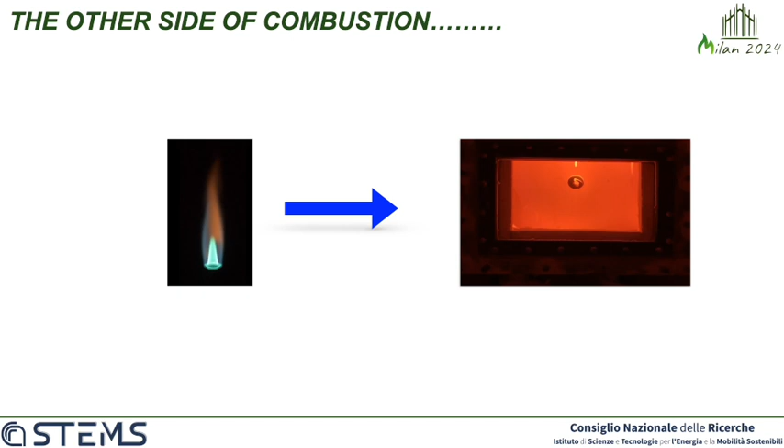Because this symposium aims to emphasize energy transition, I would spend a couple of words talking about energy, looking at needs and critical issues that we have to face for transition, and what is the role that the combustion process has to cover during and beyond the transition, and how we can frame the role of mild combustion, looking at its feature structure that we can see in the volume, fuel flexibility in terms of kinetics and pollutants, and the related research needs and challenges.

I'm saying nothing new, underlining that there are two main enabling concepts for energy transition: the utilization of renewables, which has to be maximized, and the electrification of the energy grid, which is often thought of as the highway for the exploitation of renewable energy sources.

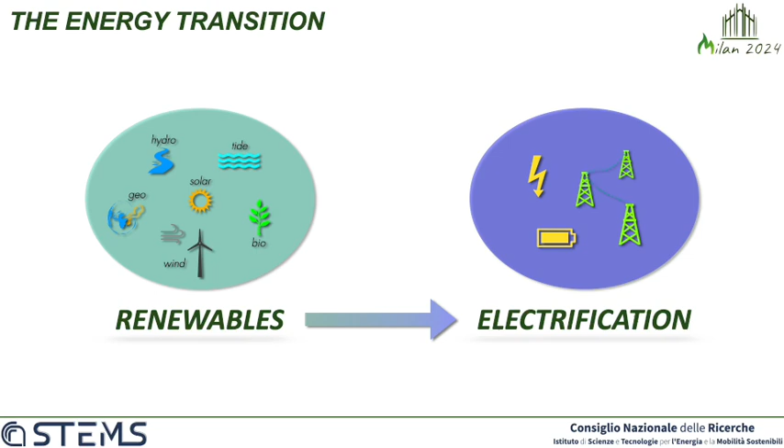In this panorama about the shared installed capacity of renewable energy sources, we have to face a very huge number that has to be phased in the very next years, because the installed capacity is considered to increase by about 188%, with a shared capacity that has to reach 77%.

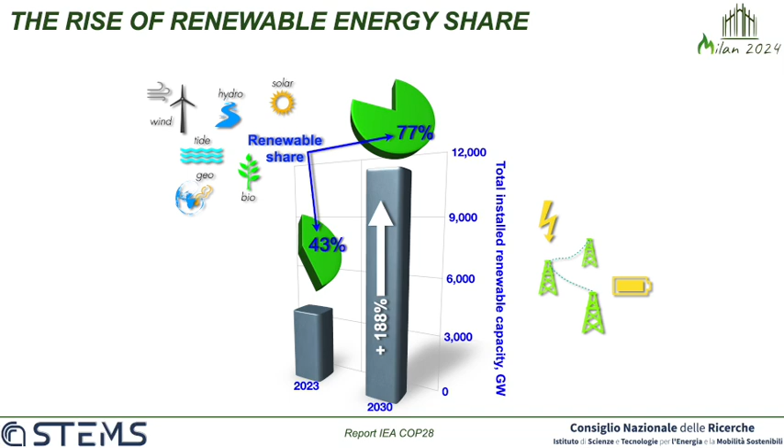To face with such a huge amount of installed capacity, we have to deal with two main issues: availability of critical metals and infrastructure.

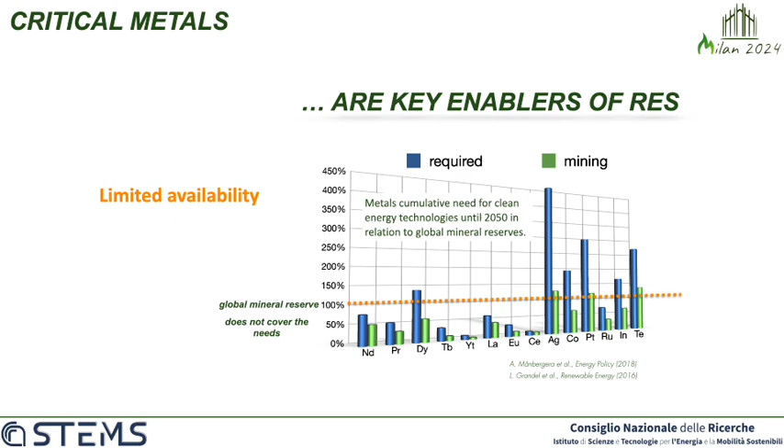Why critical metals? Because they are key enablers of renewable energy sources, and when we look at the needs of metals for energy transition, the numbers show that the global mineral reserves needed to meet the target of energy transition do not cover the needs. And it is even worse if we look at the capacity to mine the metals, due to technological limitations of mining.

Of course, the requirement could be satisfied with end-of-life recycling, but we would need a certain rate of end-of-life recycling in order to meet the energy transition goal, and the actual rate is like this. Thus, the critical mineral shortage could disrupt the global supply chain.

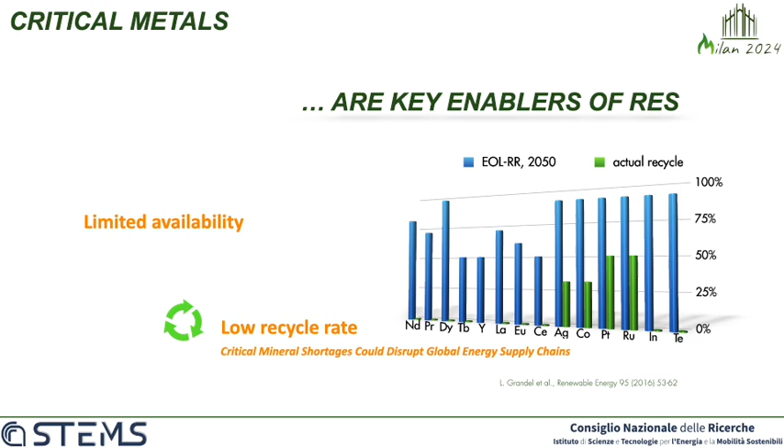Of course, there are other drawbacks that come with massive utilization of critical metals: the impact that massive extraction of metals has on the environment, in terms of disruption of mining regions, and the huge amount of pollution of land, water, and air, which causes severe environmental damage.

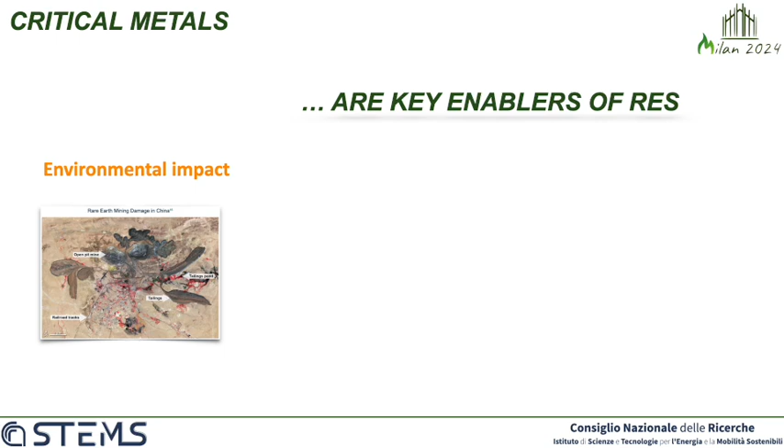There is a second critical point related to the environmental impact of critical metals: the exploitation of unexplored regions for mining of critical metals.

This is the case of, for example, deep sea mining - the sea deeper than 200 meters - which has abundant levels of metals such as copper, cobalt, and nickel in different geological aggregates. It is estimated that the sea has cobalt, for example, about 6 times as much as the current land-based reserves, a reserve that corresponds to $16 trillion.

The race for deep sea mining has already started, but unfortunately the mining of all these materials has an unforeseeable and unavoidable impact over the ocean and over areas and ecosystems that are still unknown.

Indeed, cutting and dragging of rocks generates localized plumes and solid waste material deposits, which also contain heavy metals, so they are toxic and can affect fish resources.

Another point of pollution is noise pollution, which will impact whales and other marine life.

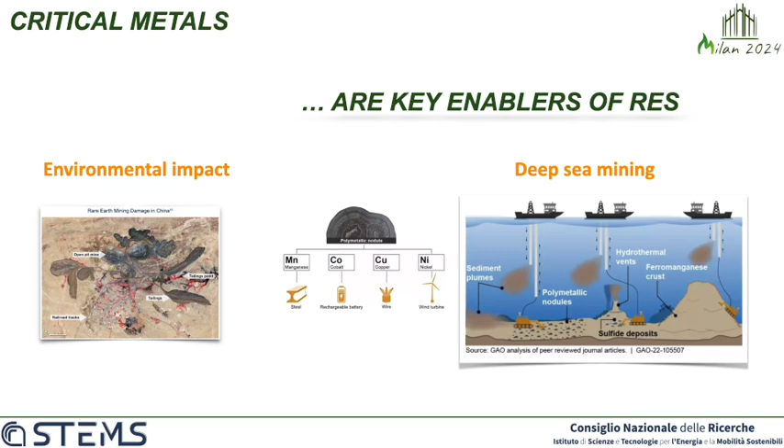The other issue we have to face during energy transition is the availability of infrastructure. We have to keep in mind that, just looking at non-industrial applications, people with no access to electricity account for about 10% of world population - almost equivalent to the European population, or 3 times the US population.

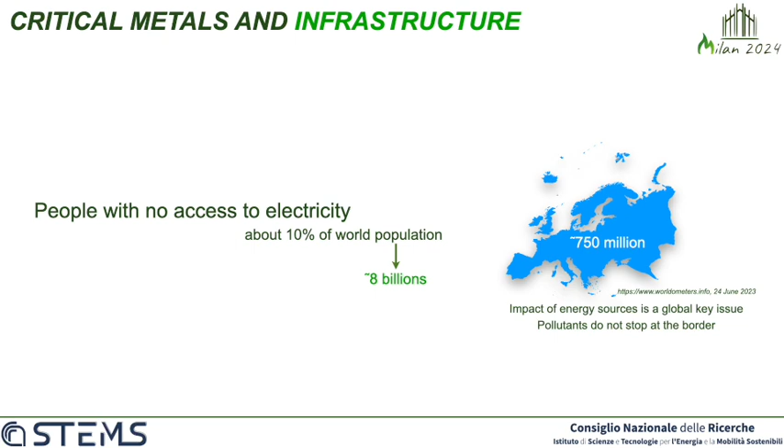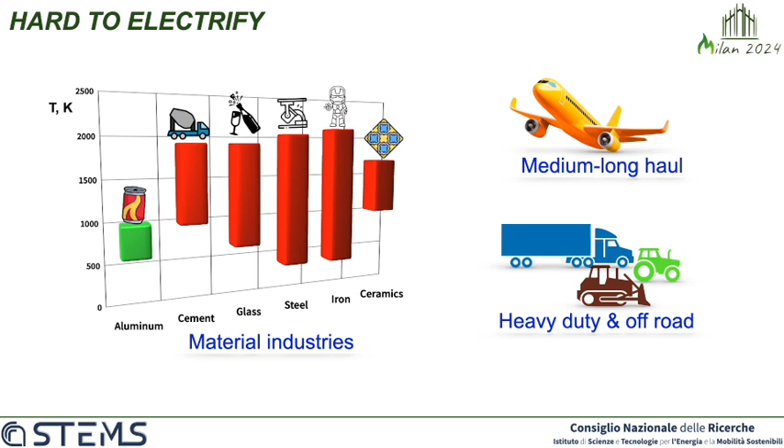Of course, the same problem with infrastructure is also relevant for industries, but the other point for industries is that there are many sectors that are hard to electrify because of the temperature involved in the process, for example. This is the case of materials industries, or because of obvious considerations related to aviation and heavy duty transport.

Of course, in this framework, combustion has to be thought of and becomes a key enabler of renewables, covering a fundamental role in support of renewable deployment.

Indeed, combustion helps to maximize the use of renewables, taking advantage of chemical storage, which is by far the most efficient way to store energy in terms of duration and capacity.

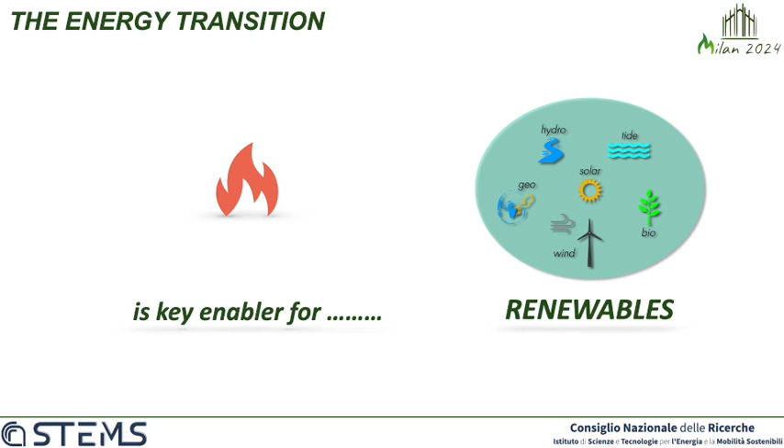The net outcome is that following that path we have a very wide palette of molecules, from low calorific value as biogas and ammonia to alcohol, biomethane and hydrogen. These are only a few examples that have very different characteristics in terms of combustion intensity, so very different heating value, flammability limits and laminar flame speed.

So what is the point? We need an ideal combustion system that should go beyond these characteristics and should meet the criteria of flexibility, both in terms of fuel, to easily allow fuel switching based on locally and timely available energy carriers, and also in terms of operational conditions in order to meet the characteristics of the process, so in terms of composition, load, temperature and so on.

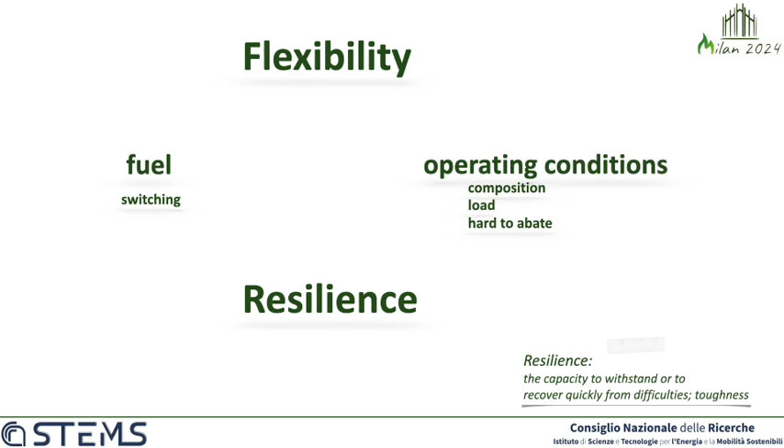So coming back to the other side of combustion, mild combustion is one combustion process that meets this criteria of flexibility. So what about mild combustion?

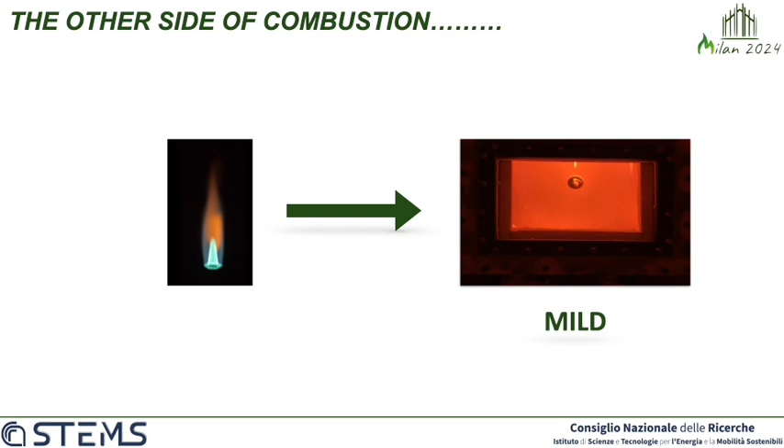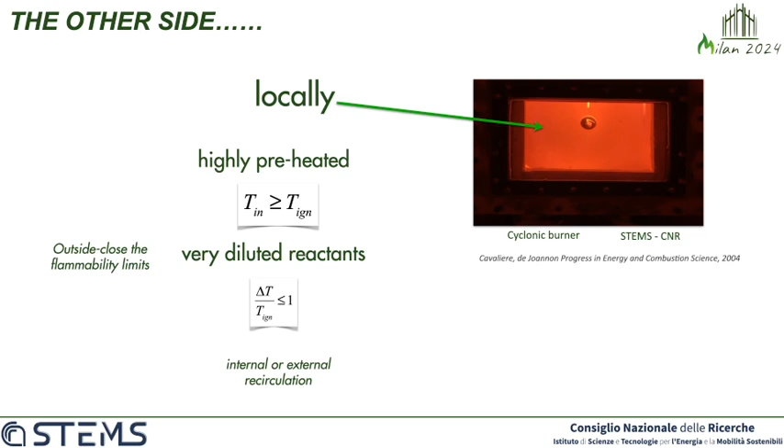It evolves from highly preheated reactants, preheated at temperature higher than their ignition temperature, and very diluted reactants, diluted at a composition that falls outside the flammability limit. So they are so diluted that their temperature increase during combustion is lower than the ignition temperature.

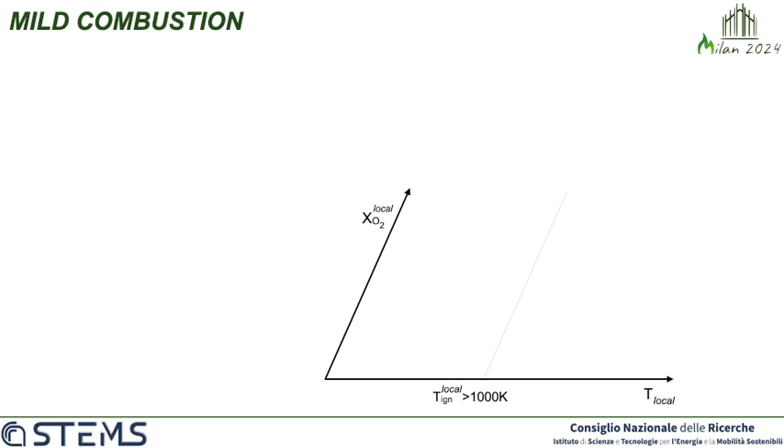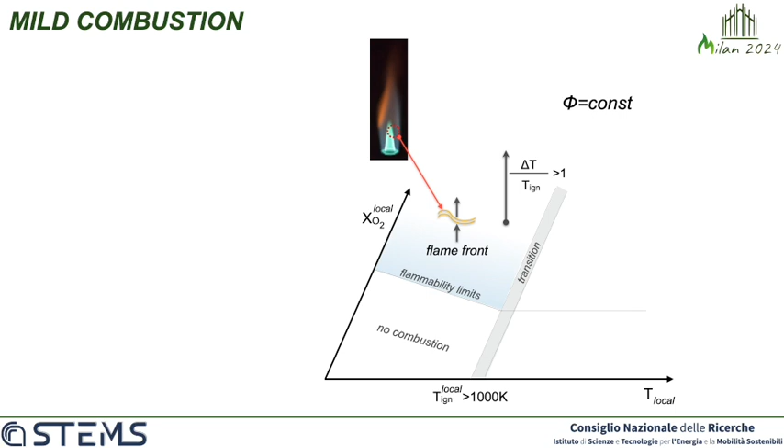Looking at a map where oxygen molar fraction and local temperature are reported, the upper left region is related to the standard combustion process, with oxygen molar fraction higher than flammability limits, associated with the stabilization of a flame front and high temperature increase. Mild combustion is placed in a different region where we have a different kind of process.

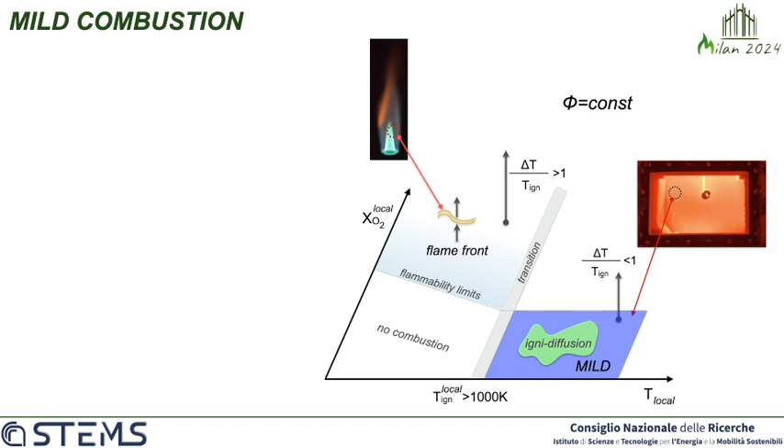It is really clear that lowering the oxygen concentration, corresponding to a high recirculation rate, there is a strong decrease of the Damkohler number. So the fluid dynamic and chemical time scales become comparable.

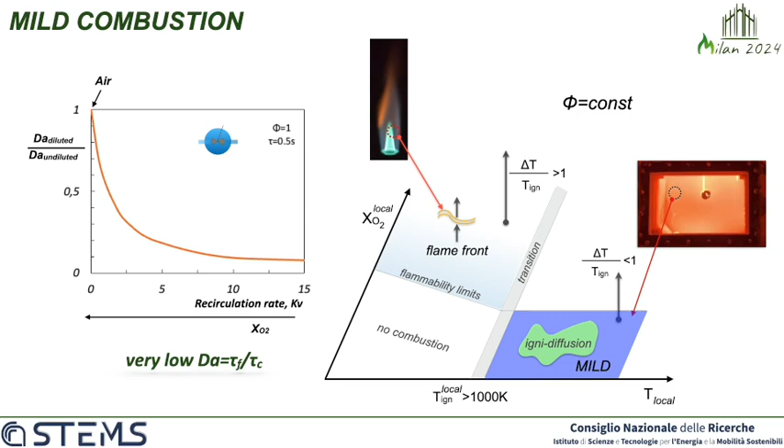If we put together all the keywords we talked about - low temperature, dilution, preheating, recirculation - altogether we have a process that leads to inherent features.

Indeed, it is flameless - no flame structures are visible in the visible range. It is noiseless. It is characterized by a uniform, almost uniform temperature and concentration profile. It is intrinsically self-stable because it evolves from ignition temperature. It is based on ignition.

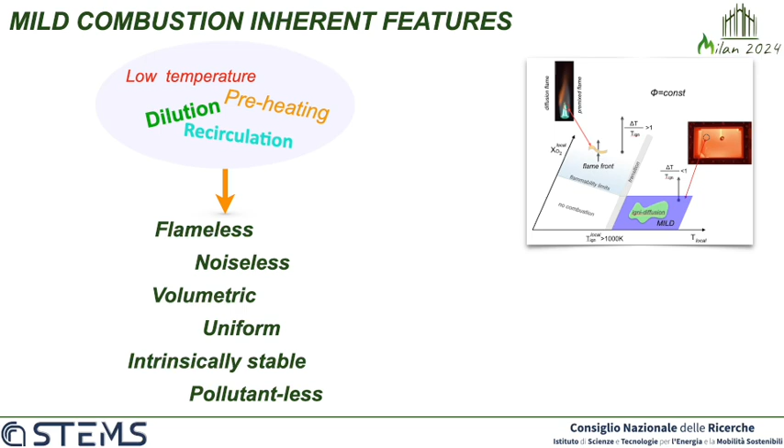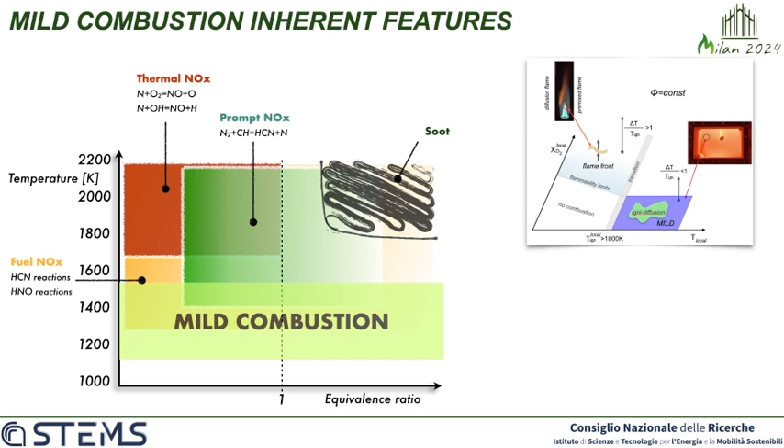It is pollutant-less. And indeed, if you look at the temperature and composition range related to the main pathway of pollutant formation, we see that mild combustion falls outside the range of, for example, thermal NOx, which is the main pathway for NOx formation, and for sure outside the range of soot formation.

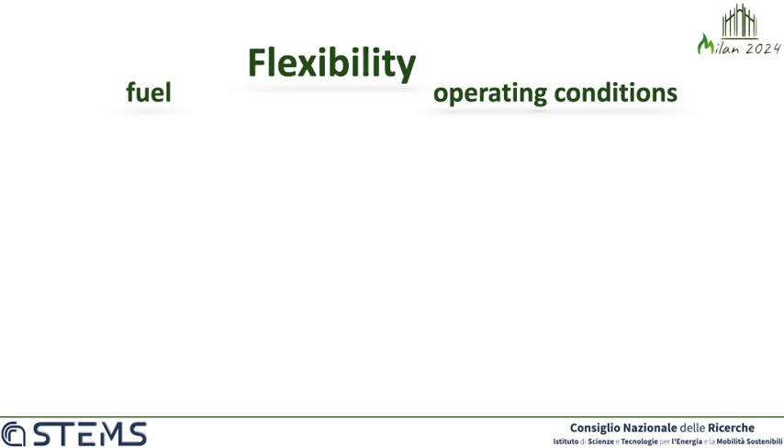So let's go analyze the flexibility of mild combustion. Mild combustion was proven to be a robust combustion system for fossil fuels.

Let's explore the flexibility of mild combustion looking at those carriers that are archetypal for the energy transition, I mean hydrogen and ammonia, that also with respect to the characteristics of fossil fuel move towards opposite directions. So H2 with high combustion intensity and NH3 toward low combustion intensity.

This is, of course, related to their characteristics as fuel - higher combustion intensity for hydrogen and lower combustion intensity for ammonia. This, in this case, is mainly related to the heating value of the different kinds of fuel. So how to reach, from a practical point of view, the local dilution and preheating needed for reaching mild combustion?

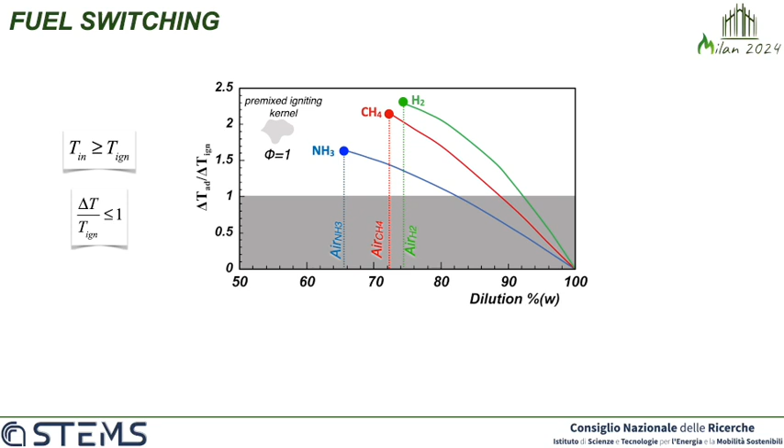In general, there are two main configurations that are taken into account. The reverse flow, where a confined burner is considered, and in this case a large part of the fluid is bended and returned towards the inlet region. And in some cases, the outlet is on the same side as the inlet section.

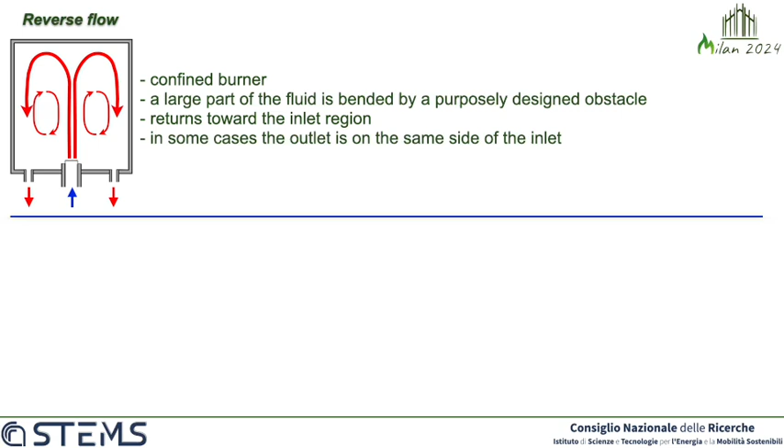And this is the example that is available at laboratory or pilot scale in many research centers all over the world, from Portugal to Australia to Germany and to Brussels.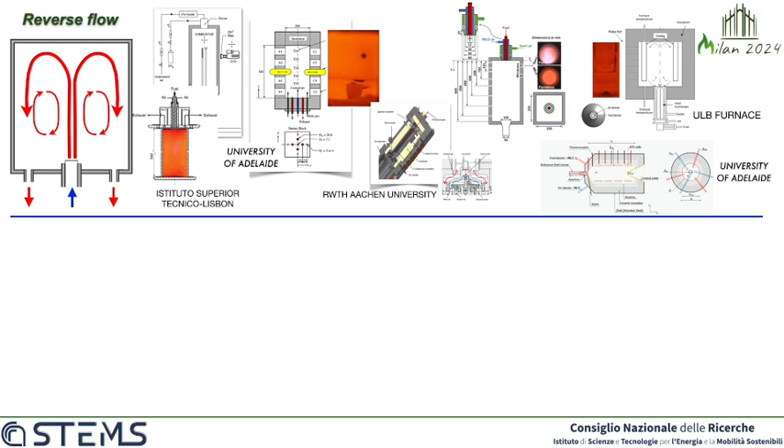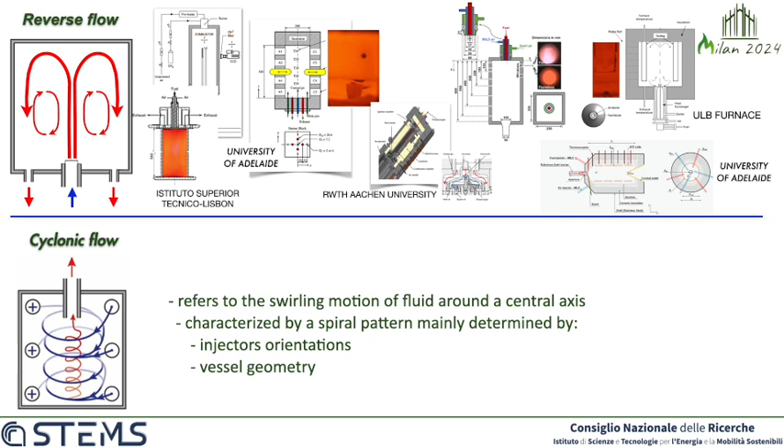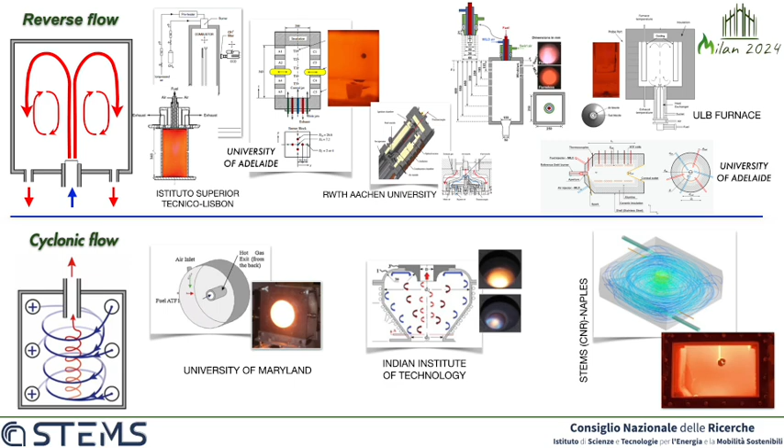The second configuration refers to a cyclonic flow that is mainly considered a swirling motion of fluids that move around a central axis, characterized by a spiral pattern mainly determined by injector orientation and vessel geometry. Also in this case there are many examples at laboratory pilot scale all over the world, in groups that work on mild combustion.

As already told, we have a change in paradigm of the ratio between fluid dynamic and chemical time scale. Traditional combustion processes are characterized by the fast chemistry hypothesis because chemical times are very low with respect to physical time scale. In mild combustion, the fluid dynamic time scale is comparable to the chemical time scale, because it evolves with a very low Damkohler number.

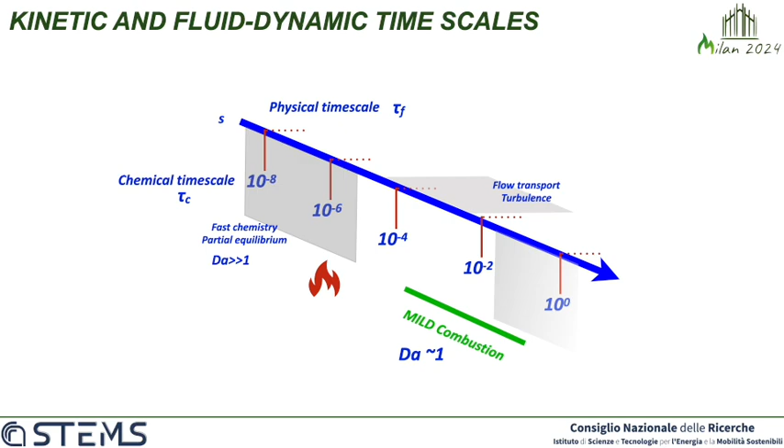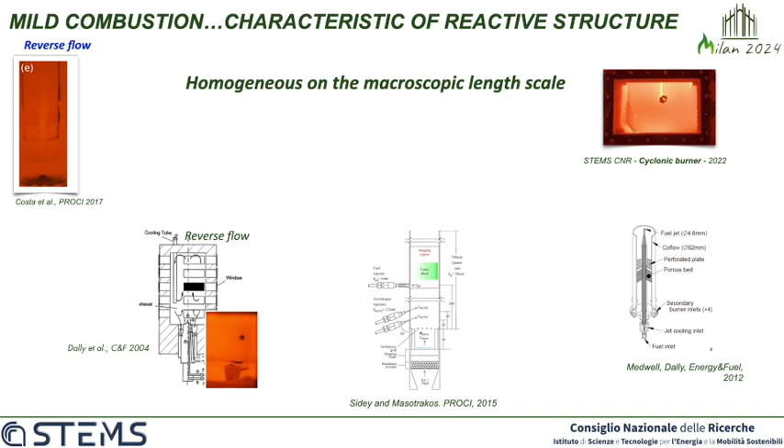Let's see how this impacts the characteristics of mild combustion. It is a process considered homogeneous at the macroscopic length scale of the combustion chamber, characterized by a nearly homogeneous temperature and concentration profile on the macro scale, but it is inhomogeneous at a smaller length scale, as demonstrated by optical diagnostics applied to the combustion chamber working in mild condition, shown in the figure.

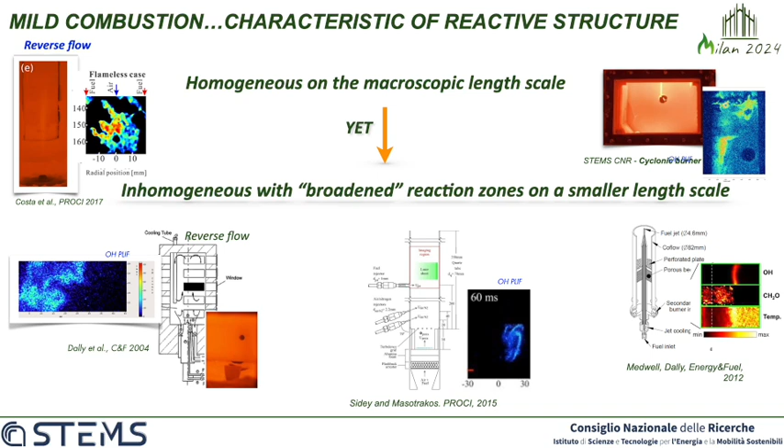On the micro scale there is evidence of a patchy appearance of spontaneous igniting kernels that ignite, grow, and then disappear. Authors, also in direct numerical simulation studies, evidence this distributed zone with different shapes, identified based on their form as blobs, pancakes, and ribbons, single or interconnected, mainly based on igni-diffusion.

Igni-diffusion is a specific spontaneous ignition process that, at the dissipative scale, differently from autoignition which is a homogeneous process, considers, in addition to the generation term, also the diffusion process, which in this case matters.

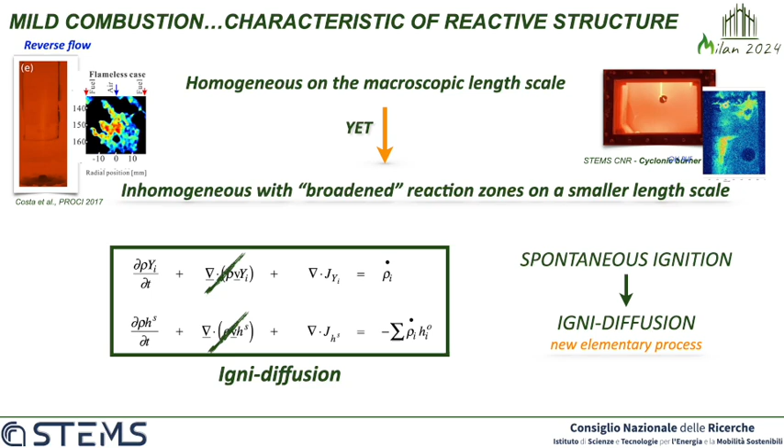An extensive characterization has been made in the literature of igni-diffusion, looking at the evolution of the process and the stabilization of a structure in a mixing layer derived from the interaction of hot and diluted streams of fuel and oxidant, in particular looking at the shapes of heat release rate in the mixture fraction domain.

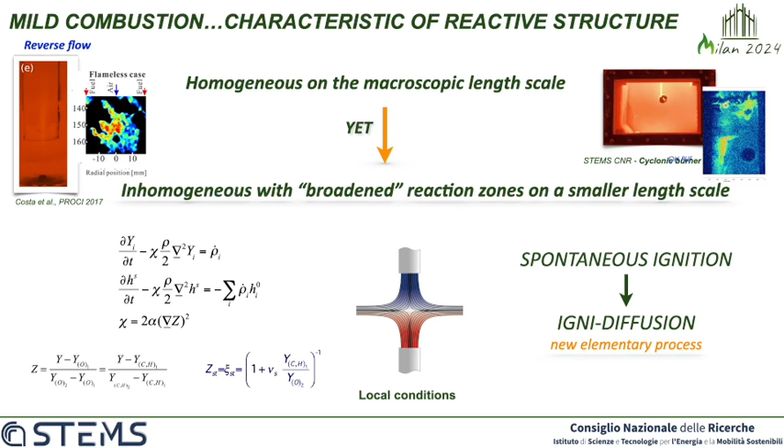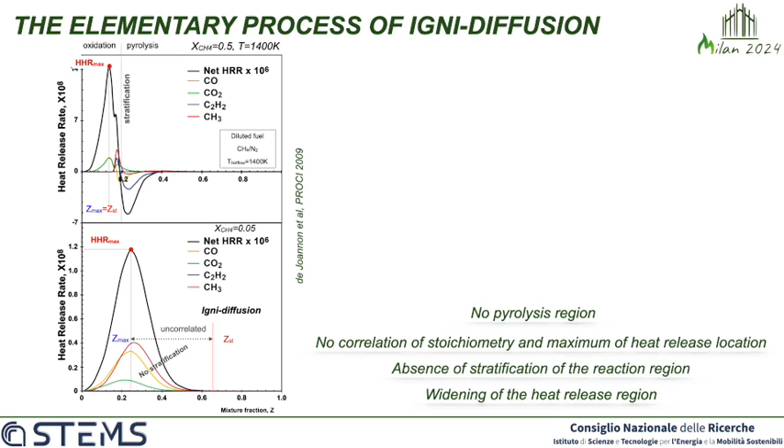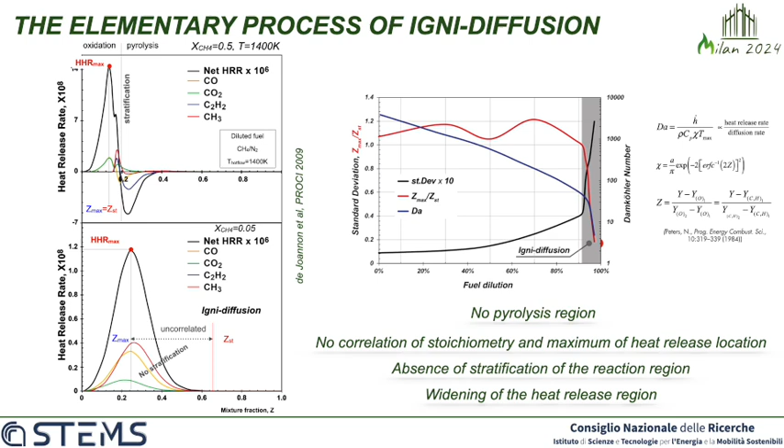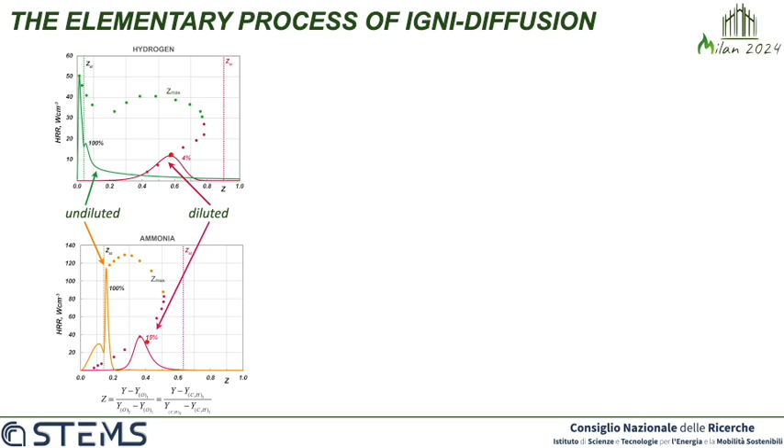This happened for methane, but the same characteristics are kept for the igni-diffusion structure of ammonia and hydrogen. Looking at the heat release profile of hydrogen with increasing dilution, we see that the stoichiometric mixture fraction is correlated with maximum heat release until a certain dilution value where this correlation is lost. At the same time the profile widens as in the case of methane, and this also occurs for ammonia. Looking at the Damkohler number with respect to fuel dilution, the same trend as methane is obtained.

So independent of the carrier, it is possible to identify a dilution range where igni-diffusion occurs with analogous characteristics. But as we already stated, there are different ranges of dilution where mild combustion, or in this case igni-diffusion, occurs: ammonia reaches igni-diffusion condition at lower fuel dilution, while hydrogen shows the profile related to igni-diffusion at higher dilution level.

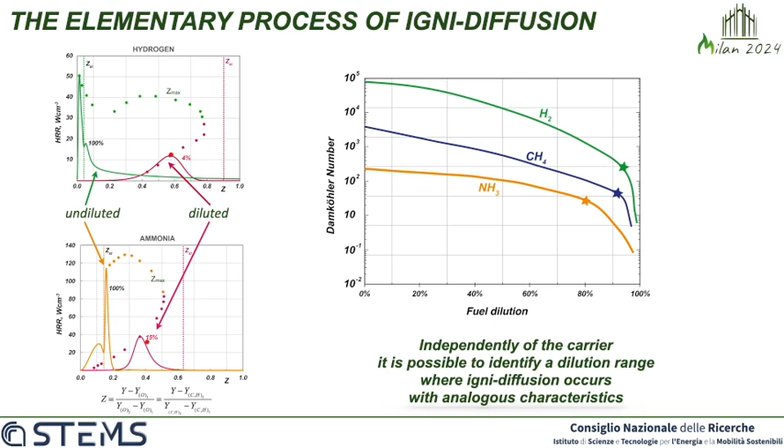With a Damkohler number so low, the kinetics is very relevant and it helps to identify some invariant key parameters for stabilization of mild combustion, such as a characteristic temperature.

If you follow the ignition of the system over time, here is a qualitative diagram. In the range of interest, the temperature evolves following this kind of trend: starting from an initial temperature, it reaches the ignition temperature, defined with the proper criteria, through the intermediate temperature branching reaction system, and then the temperature increases toward the adiabatic temperature.

In case of appropriate inlet initial conditions, the system evolves directly through explosion toward the adiabatic temperature, through the high temperature branching of the hydrogen system.

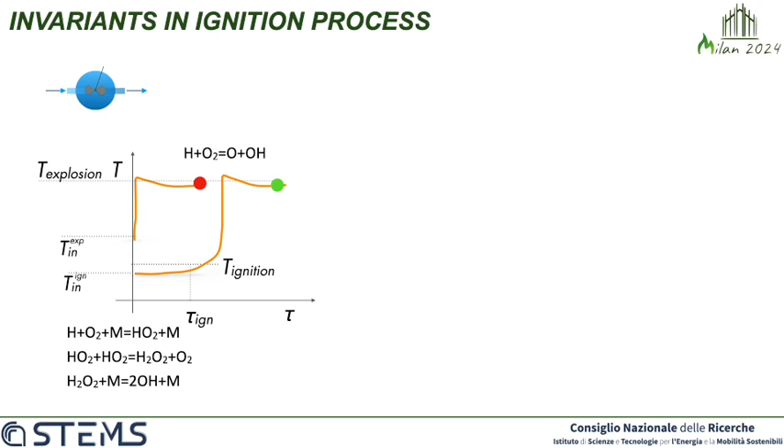So if you look at the temperature increase that we reach after the ignition as a function of ignition temperature, we see that if this is the value obtained for air, increasing the dilution, this value of course decreases as the temperature of ignition increases, up to reach a certain value where the two values, the temperature increase and the ignition temperature, coincide. So the ratio that we have identified as the mild combustion region is equal to 1. From this starting point, further dilution increase makes the system work in, let's say, mild combustion conditions.

What happens if I consider the temperature at which the explosion occurs? We can see that these two temperatures, the one related to ignition and the one related to explosion, are different until a certain value of dilution. After that, they almost coincide. This is a signature that at high dilution level, the process evolves through the high temperature branching of the hydrogen system.

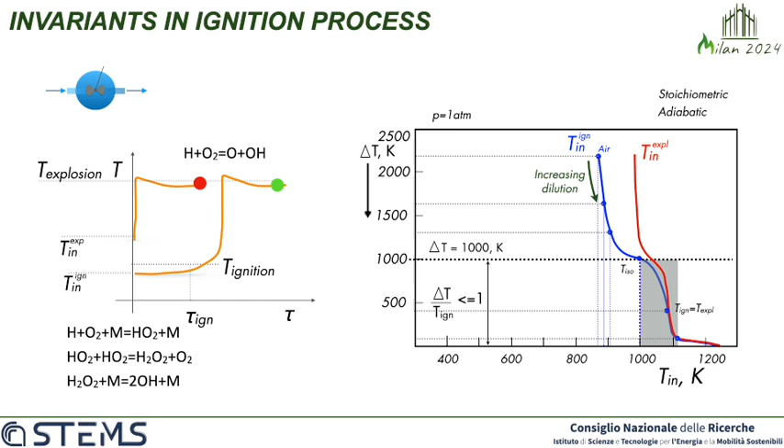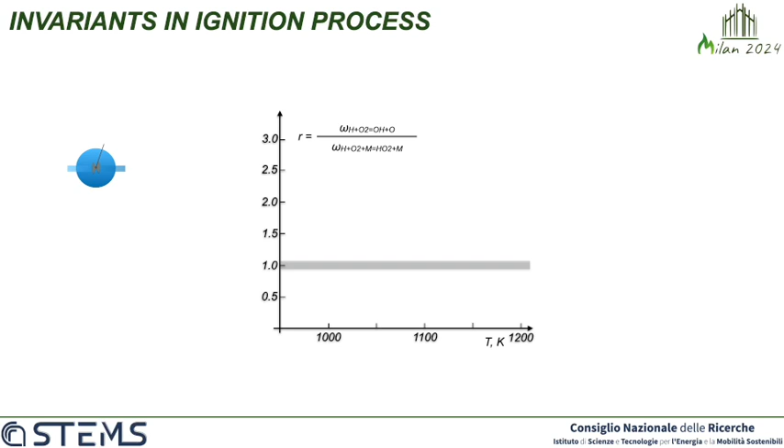Indeed, if we follow the ratio between high temperature branching and intermediate temperature branching of the hydrogen system in the case of methane ignition, we see that in the case of air, so no dilution, this is the trend of this ratio, and it is always lower than 1 until very high temperature. What happens with dilution? Dilution makes this ratio shift toward higher values until reaching some value of dilution where the ratio is always higher than 1, and this defines that the process evolves through the high temperature branching.

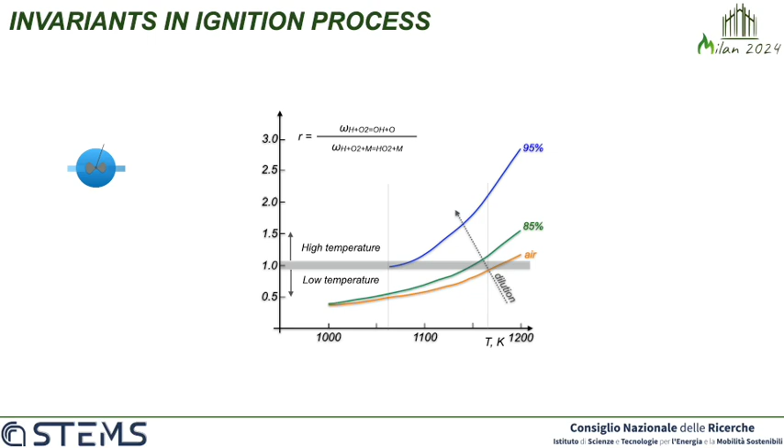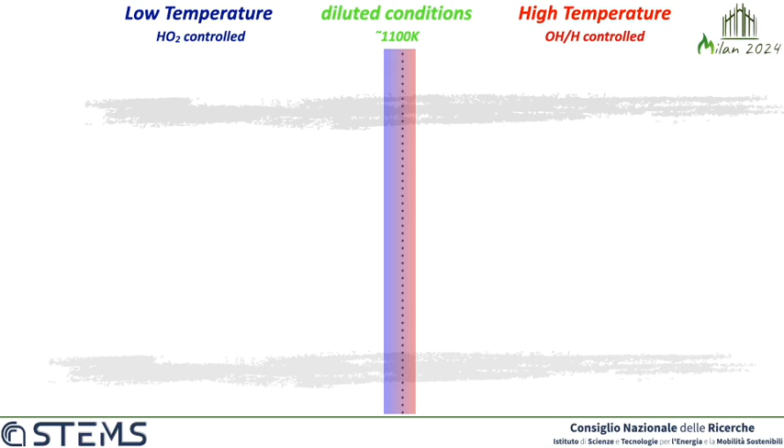The same discussion can be done for the other carriers, methane and ammonia, because the low temperature branching and high temperature branching characteristics of hydrogen also sustain, of course, the low temperature oxidation of methane and of ammonia, and at the same time the high temperature oxidation of methane and of ammonia. And the temperature that signs the passage from one controlling mechanism to the high temperature controlling mechanism is very critical for stabilization of mild combustion.

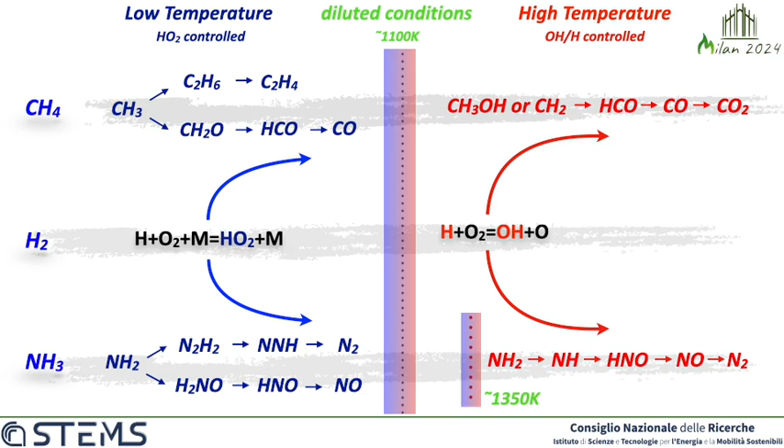These invariant temperatures have been identified experimentally in the cyclonic burner we used to widely characterize mild combustion for many energy carriers. Looking at methane, pyrogas, alcohols, and ammonia, we found this invariant temperature. And what we see also in this figure is that we were able to stabilize the process also outside the flammability limits. This is quite obvious because a mild combustion process relies on autoignition and not on flame propagation.

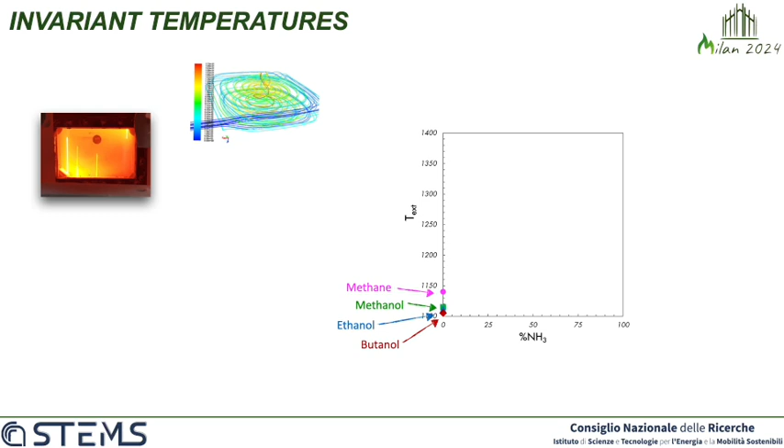It is also interesting to see how mixtures of carriers behave with respect to the minimum stabilization temperature of mild combustion. So it is interesting to look at results obtained from the study of mixtures with ammonia, and we see that if the minimum temperature of this carrier lies in this region, between the temperatures highlighted in the previous discussion, and ammonia instead is in this region, the minimum temperature of the mixture lies on this line, and they delimit the region where stable operation can be found for this kind of system.

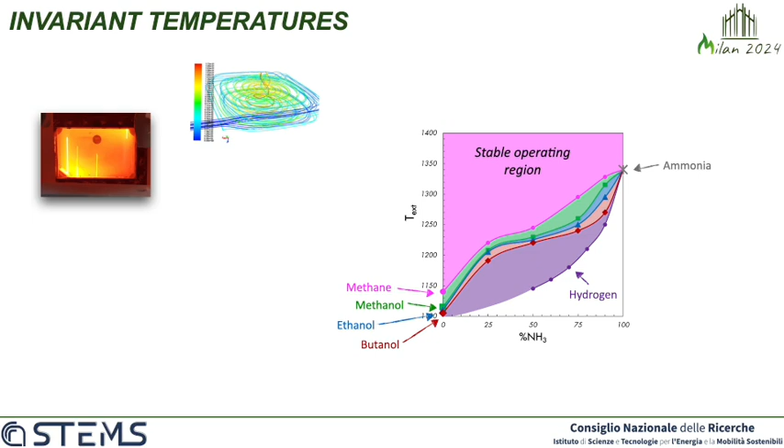In the case of hydrogen, it is also possible to identify a minimum value of the temperature for which it's possible to stabilize mild conditions for its mixture with ammonia, but we are not able to consider 100% hydrogen in this condition. So in principle, we have not identified the hydrogen minimum temperature for mild combustion stabilization in the cyclonic burner, but in literature, a numerical study supported by experimental evidence identifies the minimum temperature for hydrogen mild combustion stabilization in the same range that we have identified for other fuels.

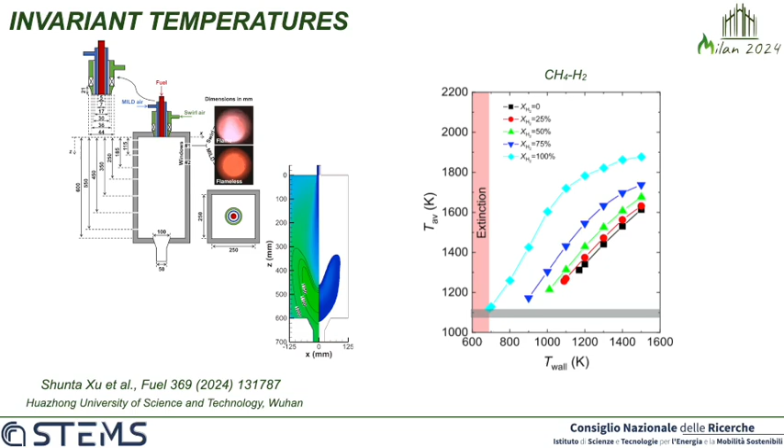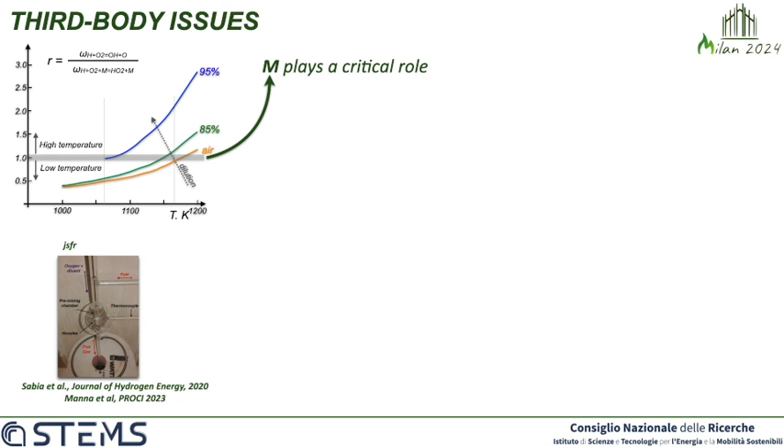So the dilution highlighted a very critical role of third body species. Indeed, the dilution makes the reaction evolve in the presence of higher amounts of, for example, CO2 and water than in the standard combustion case, which have a very high third body efficiency with respect to other species, and therefore their evaluation becomes very critical.

Indeed, it assumes very high values that are also very different, passing from one chemical mechanism to another. But the key point also to be underlined is that new molecules can be considered as relevant at the same level of water, for example, as a third body in chemical kinetics. This is the case, for example, of ammonia, that is more polar than water.

It has been demonstrated that it acts as a third body species in many reactions with very high efficiency as third body. But ammonia is not the only carrier that has to be taken into account as a third body when we look at kinetic mechanisms of these new carriers, because also alcohols, for example, can have the same characteristics, but no information in literature is present yet.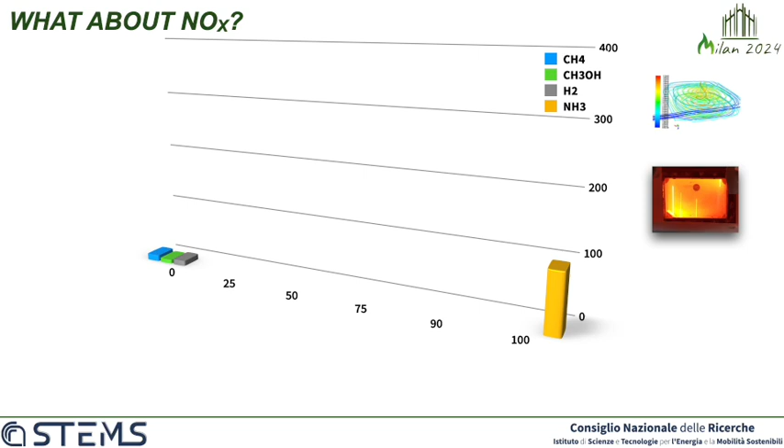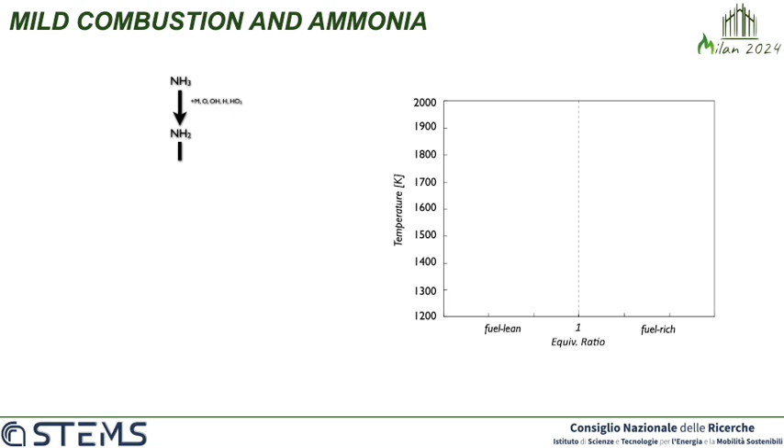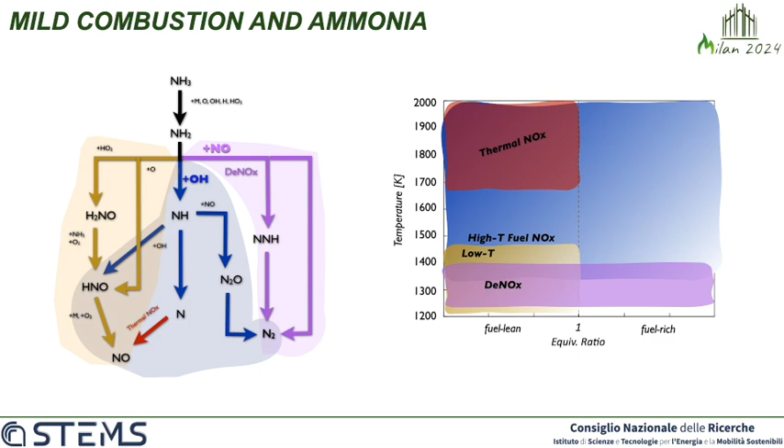To understand this point, let's give a look to ammonia combustion kinetics. We know that the first relevant step is that ammonia dehydrogenates to NH2, that at low temperature leads to formation of NO through the formation of H2NO species or directly. In the same temperature range, the DeNOx chemistry is also active, consuming the NO present, possibly passing through the formation of NH. At higher temperature, NH2 dehydrogenates again, leading to N2 formation and destruction at temperature higher than 1400 K. At higher temperature, the thermal NO is formed, and also the recombination of NH2 occurs at higher concentration of fuel.

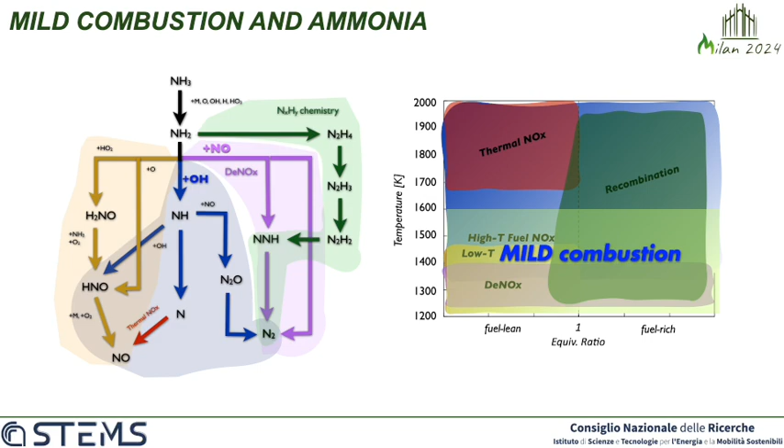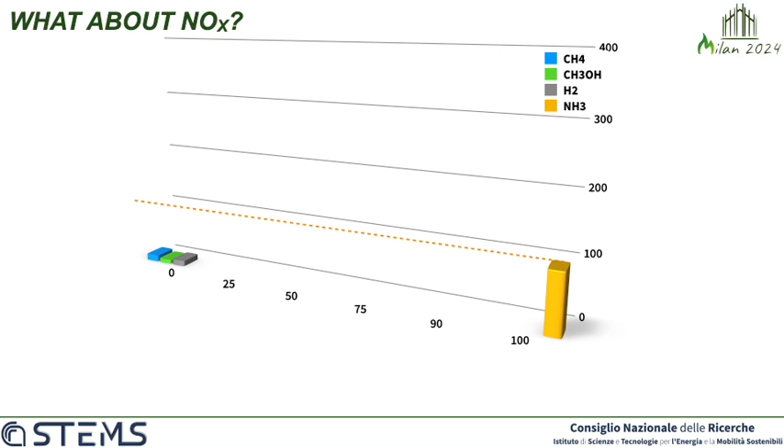So what is the point? It is that mild combustion is stabilized in the temperature range where thermal NOx are not formed, the channel is not active, and the DeNOx chemistry is active. What is interesting to know is that when we look at a mixture between these carriers, I mean methane, alcohols, hydrogen, with ammonia, the situation is worse because the presence of methane, hydrogen, and alcohol increases the concentration of OH that limits the DeNOx channel that is responsible for the destruction of NO during mild combustion.

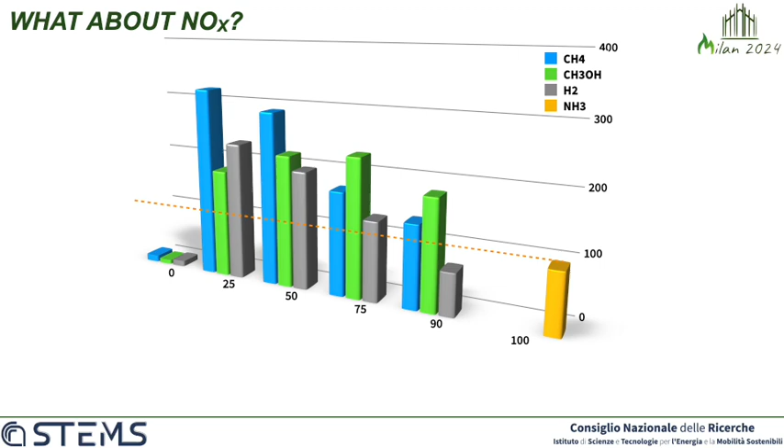A key relevant strategy that can be used thanks to the characteristics of mild combustion is the use of water for further reduction of NOx emission. Of course, this strategy has been proven from an experimental point of view in the cyclonic burner, but it is also demonstrated from a numerical point of view, considering a jet in hot co-flow configuration.

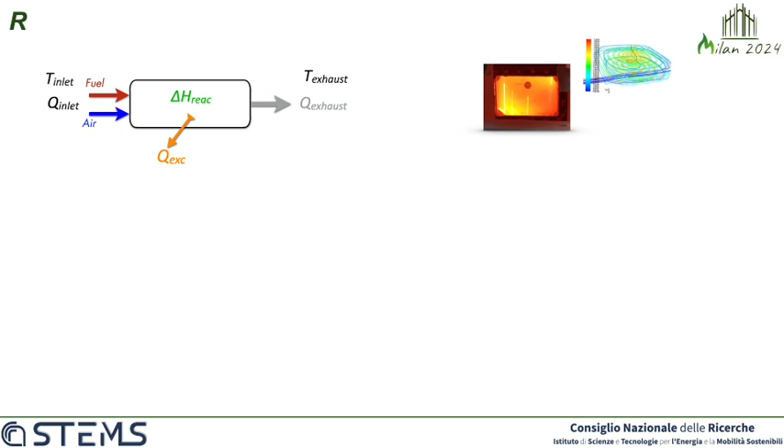As already stated, the conditions we look at are local conditions when we discuss mild combustion, I mean in terms of dilution and preheating. This means that mild combustion can evolve from fresh air and undiluted fuel. This, of course, means that the heat exchange is a key relevant point for stabilization of this kind of process. Indeed, starting from fresh air and undiluted fuel, it is needed to exchange the right amount of heat in order to reach the condition of mild combustion.

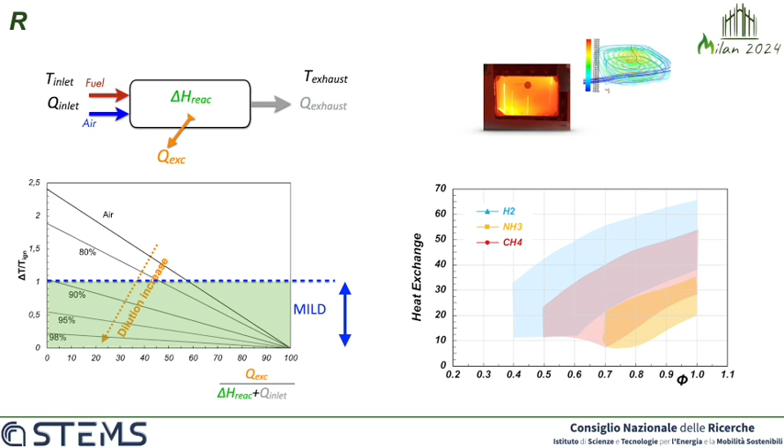So, looking at the carriers that we have identified, hydrogen, ammonia, and methane for comparison, and having identified the minimum temperature that we have to reach inside the combustion chamber in order to stabilize ammonia, hydrogen, and methane combustion, it is easy to identify the region of heat exchange where we can stabilize the process. And the limits of this range correspond to the minimum temperature that we need for mild combustion stabilization and the maximum temperature that characterizes the mild combustion process. It is worth noting that data collected in the cyclonic burner using these three carriers fall in the range identified on the diagram.

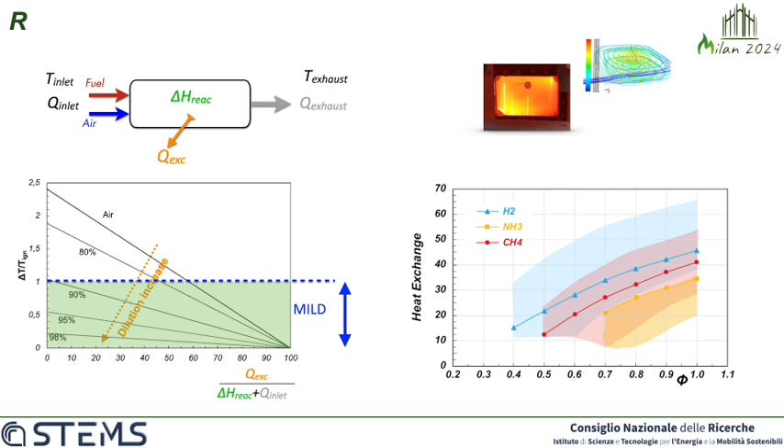The radiative heat transfer in mild combustion is much more relevant with respect to other combustion processes. This is widely demonstrated in literature, and this is a key point when we are looking at new carriers as hydrogen. Indeed, fixing the power for a specific system, if we use hydrogen instead of, for example, methane, we have a lower concentration of emitters in the reacting volume. But in literature it has been demonstrated that overall the net heat flux increases using hydrogen because of the locally higher temperatures that are reached during hydrogen combustion.

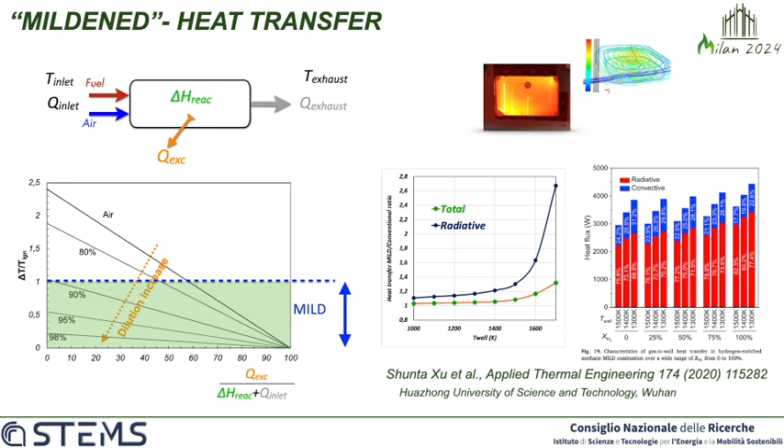Nevertheless, if there is the need of increase of radiative heat transfer, it is possible to use the strategy of adding emitters like water in the combustion volume, because this does not alter the stability and the characteristic of the process.

So what about application? In the hard-to-abate sector, mild combustion is one of the main combustion processes that is used in this energy transition. Indeed, it is at a very high maturity level, with systems that span from hundreds of kilowatts to megawatts. And of course, we refer in this case to material industries where, as you can see from the figures, the range of processes falls in the temperature range characteristic of mild combustion.

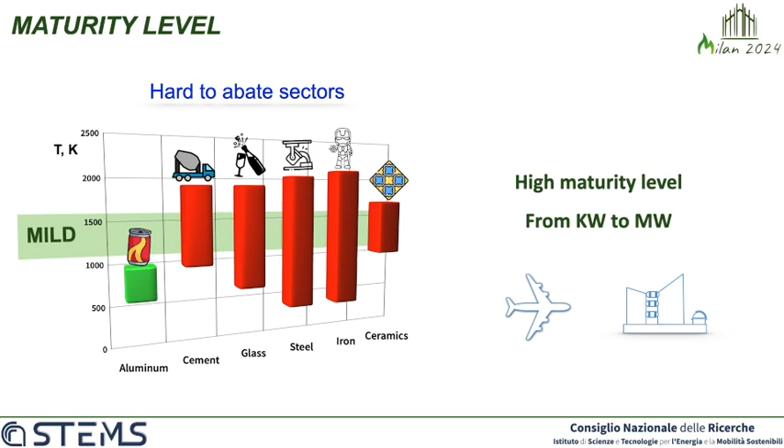What about processes that work at high pressure? They are still at laboratory scale analysis because of some issues related to stabilization of mild combustion in case of high pressure. Indeed, at high pressure the Damköhler number increases, and so, as expected, the mild combustion region appears narrower with respect to the process evolving at atmospheric pressure. At the same time, however, there will be a beneficial effect of pressure in reduction of NOx emission.

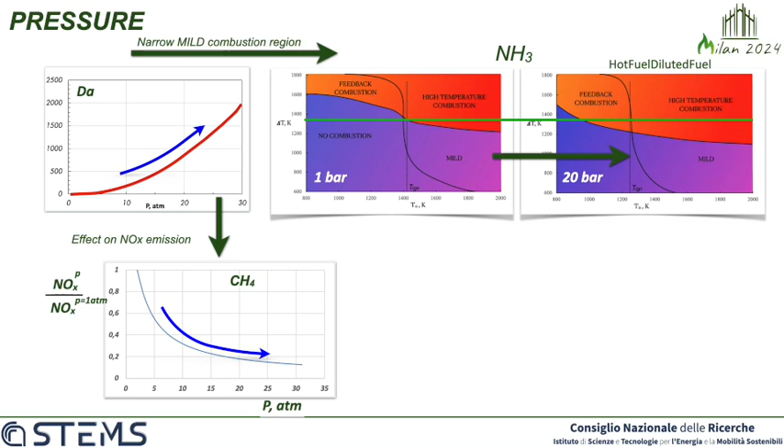There are some laboratory-scale systems that have been set up for the study of high pressure mild combustion. This is the case of the jet in hot coflow present at the University of Adelaide, or the inter-turbine burner of Delft University that relies on a cyclonic configuration, and the lean azimuthal flame at the University of Cambridge that works, in some conditions, in mild regime. And also the FLOX high pressure burner at DLR has been tested several times.

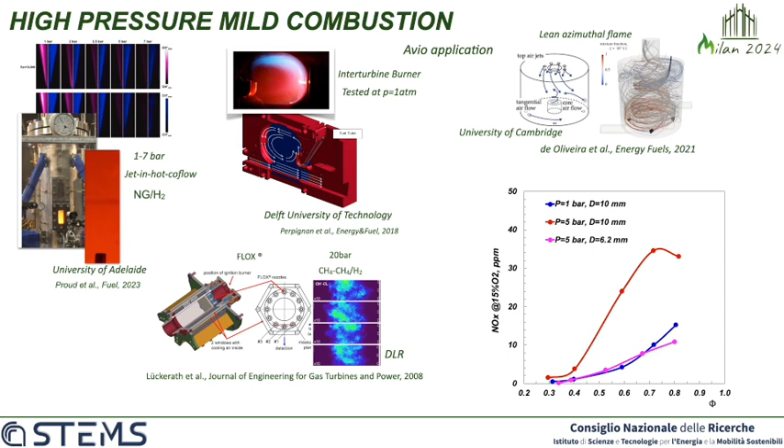Some results have been reported by a group that worked on a reverse flow configuration where mild combustion has been stabilized for methane or pre-vaporized liquid fuel, and mild combustion has been studied at 1 and 5 bar. And they showed that, keeping the velocity and increasing the pressure, they are able to keep the same level of NOx emission. Thus, no systematic studies are present in literature about mild combustion at high pressure.

And in our lab, we have set up a high pressure facility based on cyclonic flow, a high pressure cyclonic burner, with a new internal fluid dynamic configuration that is bio-inspired in order to maximize the fluid dynamic conditions and exchange inside the reactor. It just started and it will be used for a wide campaign for characterization of different energy carriers, from hydrogen to ammonia to sustainable aviation fuel, at high pressure.

Of course, this study will be supported by the results coming from other facilities, like data coming from the jet stirred flow reactor working at high pressure, which has already been set up in our labs, and the optical diagnostics characterization that will come from a scaled-down cyclonic burner that started to work in the last days.

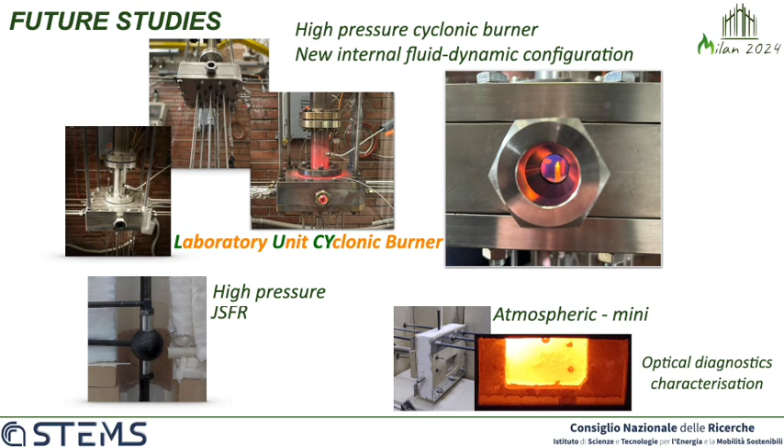So the main conclusion that we can state is that mild combustion is really fuel flexible, but there are many challenges that we have to face. First of all, we need a comprehensive understanding of local length and time scales, and effective modeling paradigms in relation to a full description of the mild combustion process. Moreover, the enlargement of the range of investigation is needed, for example, as already stated, in terms of pressure.

And it is also interesting to work on the identification of new paradigmatic fluid dynamic configurations in order to optimize such configurations in relation to the process that we need to face. It is also needed to extend the study of flexibility to other carriers with very particular characteristics, such as sludge or raw bio oils. And in this context, there are also projects active on the utilization of mild combustion in more extreme conditions in terms of fuel/oxygen ratio, in order to make it work as a reformer for syngas production.